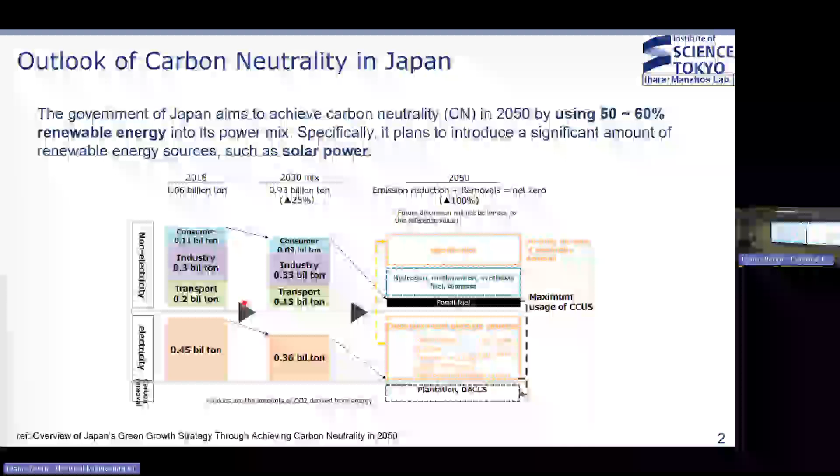So it's planned to introduce a significant amount of renewable energy, such as solar power. So in the current energy system, power generation is primarily centralized in rural areas and electricity is supplied to urban areas with high power demand through the transmission networks.

However, when constructing new PV power plants, the expansion of the power grid becomes necessary, leading to a significant cost increase. In the future, by installing solar panels on urban buildings with energy storage systems to create a distributed energy system, it's expected that grid construction can be reduced, increasing larger scale PV installations.

So to design the future energy system, our laboratory uses the only bottom-up economic model in Japan that integrates power grid models, based on the TIMES model. We use the model to explore economic combinations of technologies in the future. So by inputting thousands of data sets, there are the clean power plants and the renewable energy power plants.

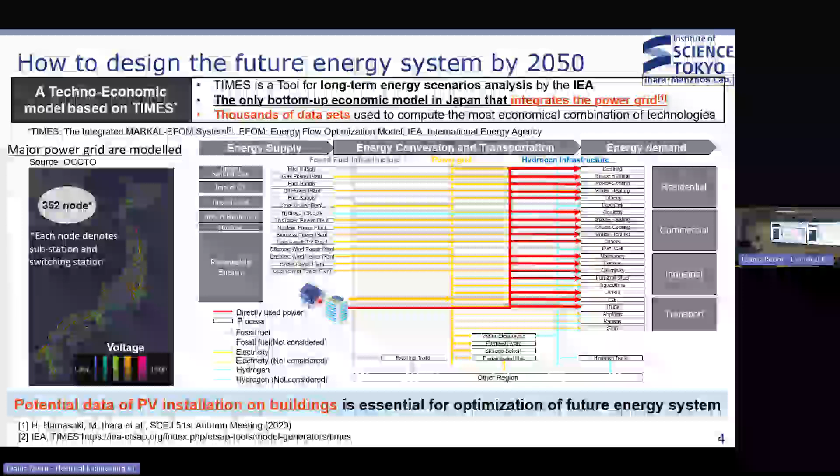We have been optimizing the energy system considering clean energy power sources. So in my study, I want to optimize the future system considering distributed power sources. So we should calculate the potential data of installation on buildings. According to data from the government of Japan, the PV potential of building rooftops has been reported for each prefecture in Japan.

The red line indicates the power demand in 2023. The power generation potential from rooftops is around 600 terawatt hours in Japan, covering about 74% of the electric demand. However, in the 12 prefectures with high demand, such as the Tokyo area and the Osaka area, power generation potential on rooftops can only cover 57% of their electric demand.

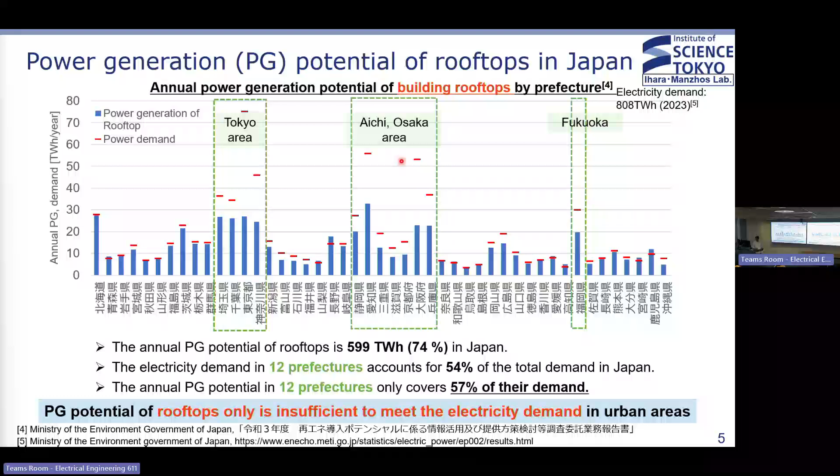Therefore, rooftops alone are insufficient to fully meet electric demand in many areas. So it is necessary to consider the installation of PV panels on facades as well. At the Environmental Energy Innovation Building at my university, Science Tokyo, the PV plant is installed not only on the rooftop but also on the south and west facades. According to the real-time data, the facade installation has doubled the annual power generation.

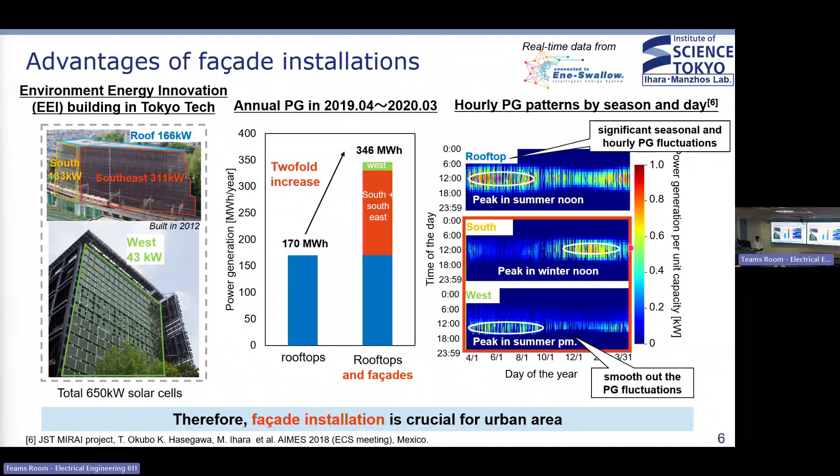Additionally, the generation peak time is different. The rooftop peaks at noon in the summer, the south facade peaks at noon in the winter, and the west facade peaks in the afternoon during the summer. When PV panels are installed on the rooftop, there's significant fluctuation in power generation due to seasonal and hourly changes. However, generation peaks of the facade installation are distributed, leading to smaller power fluctuations.

Additionally, past studies have shown that installing PV panels on the facade at an appropriate angle increases power generation. However, we believe that the PV potential has been overestimated because panel size was not taken into account. This is due to the shielding that occurs from nearby panels in larger scale PV installations. Therefore, it's necessary to account for the shadow from nearby PV solar panels.

So here's my study objective. It's to calculate the realized PV potential for building rooftops and facades in Japan, including the effect of shadows, both from buildings and from other panels, under different thresholds of the LCOE.

First, I will introduce how to quantify the shadows between panels on the facade. When setting the installation distance based on the solar altitude, the tilt angles that yield the highest solar radiation are between 60 and 75 degrees.

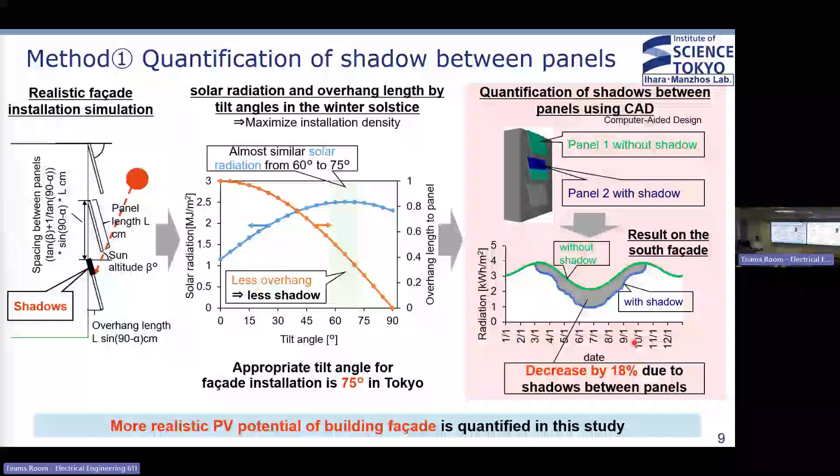So then we used the Geographic Information System, GIS, to calculate the solar radiation in Japan. First we extracted the buildings and created the power points on the roof and the facade. Then we used GIS to calculate the surrounding buildings and consider the effect from other buildings.

After calculating the solar radiation, we determine the installable area. For the technology potential, we assumed that the PV panels could be installed on the second floor, including the window and obstructions.

Then for the economic potential, we define a new threshold based on the LCOE. This threshold defines the installable area where LCOE is below this threshold. A larger threshold means more power generation due to more facade installation, but is less economic. So then we calculate the capacity potential, power generation potential, and LCOE like this.

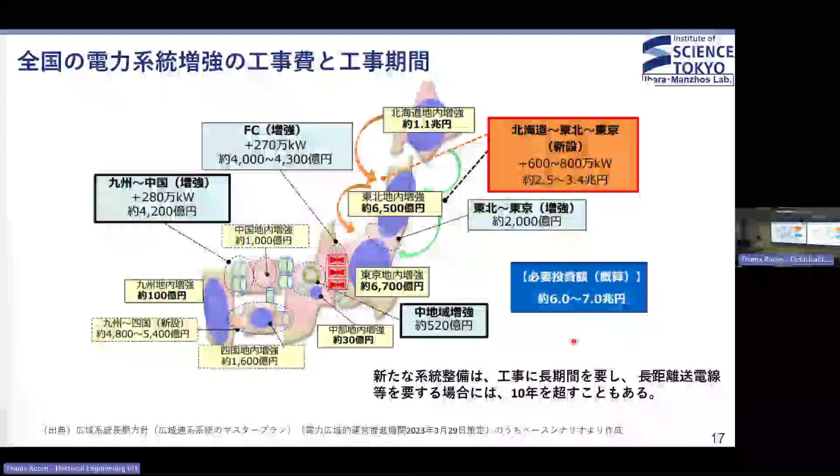But in many places, the assumption is that electricity demand will increase, with the use of more AI and IT, but also with the move towards electrification to help decarbonization. So I suppose it's just a question why the Japanese assumptions are still reducing in that context. Yeah, I think... But very interesting, thank you very much.

Thank you, thank you. I have a couple of questions here. One on the technology side - when you're saying the solar panel installation will help with energy generation and things like that, what kind of solar panels are you looking at?

It's kind of a two-parter, but the first one is: do you think the Japanese government will push this technology forward? I think there are many renewable technologies in Japan and in the world, one is solar power and one is wind power. In the Japanese government plan, wind power is only 5%, and solar power is 15% in 2030. So I think the Japanese government will give more support to solar cells than wind.

What kind of challenges are you considering or foreseeing when implementing this technology in Japan? I think the bigger challenge is the total cost, because making solar cells in Japan is very high cost, so that's a problem, I think.

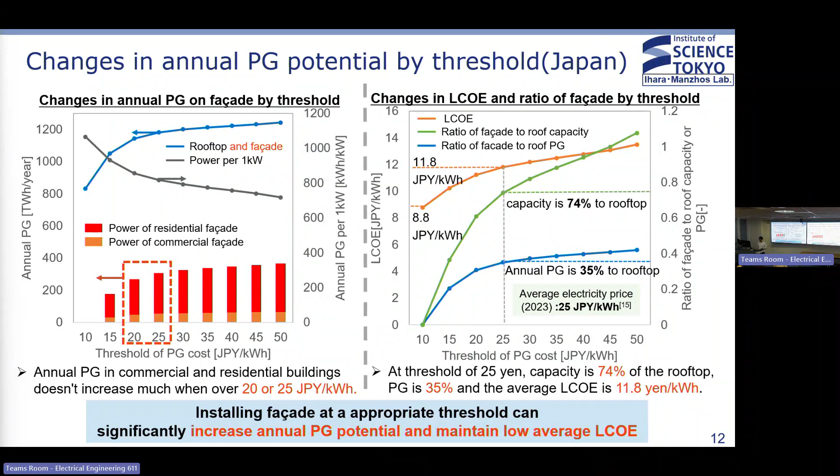Any other questions? I have one question regarding power generation. As far as I'm concerned, the three main power sources in Japan are coal, liquefied natural gas, and nuclear. They obviously have a huge amount of carbon emissions. So I was wondering, what do you think is the potential of renewable energy technology like solar panels or hydroelectricity? Is it possible to replace all the already available power sources like coal or natural gas with renewable energy sources like solar panels?

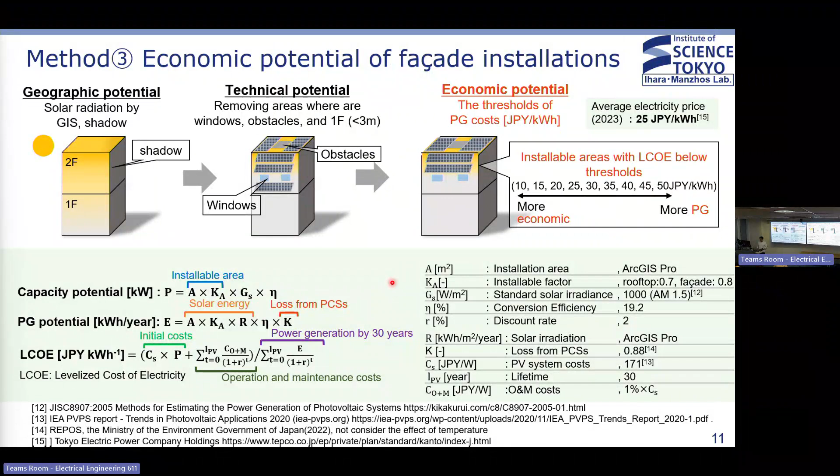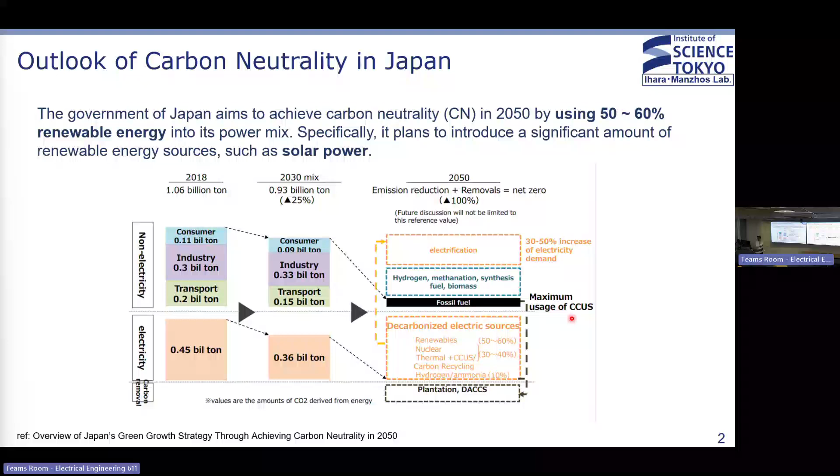Yes, as I mentioned in my introduction, nuclear is of course very important for Japan in the future, but there was a terrible nuclear problem in Japan because of the earthquake, so it's not safe for us. This number is just the lowest estimate for renewables, I think, so in the future I think renewable energy will be more than this number. That's also mentioned in the Japanese government report. Thank you very much.